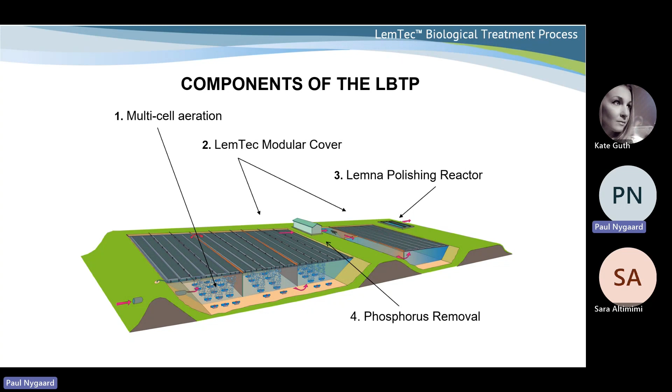So if the influent is coming in at say 10 degrees Celsius in the wintertime, and we have a detention time in the lagoon of 20 days, and the lagoon's in Green Bay, Wisconsin, we can look at historical temperature performance. We can size the insulation value of the cover so we have a known effluent coming out of the plant. That's critical from a design perspective, because now we can design at a much higher wastewater temperature. Instead of 1 degree Celsius, we can design at 7, 8, 9 degrees Celsius.

A typical covered lagoon like this will see a temperature loss in the worst time of the year, in January, of about 1.5 to 2 degrees. So it conserves nearly all the temperature that's coming into the basin. If it's coming in at 10 degrees, it's going out at 8 degrees Celsius. So that's the temperature we have to work with.

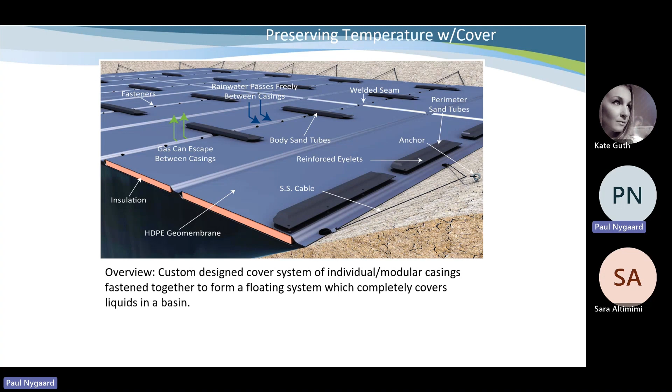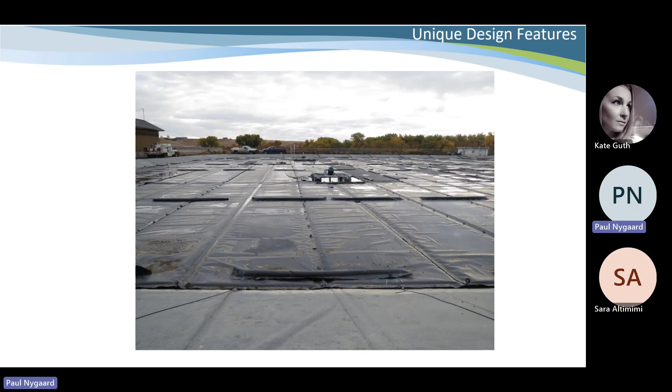Some photographs here that'll show a few more details. A couple of the main key components to point out here, you'll notice the cover panel that's immediately to the right of that mixer is a little different color. That's what we call our walkway panel. So that's a 4-inch panel. It's made from a textured HDPE. It's a little thicker panel. It just makes it nicer for walking out on the cover.

You'll notice the aeration lateral is sitting in the cover seam right to the right there, which is right here. So one of the nice features of this is our diffusers are suspended off the lagoon bottom about half a foot, and there's an access panel located here. So there's 4 diffusers on this aeration lateral. So if you wanted to service that diffuser, change out diffuser membranes, the operator can walk on the cover, flip that hatch open, retrieve the diffuser, slide out new membranes, put the diffuser back down. So it makes getting at equipment a little easier than either a floor mounted system or a system that has a floating lateral and hanging diffusers, where you'd have to be out on a boat.

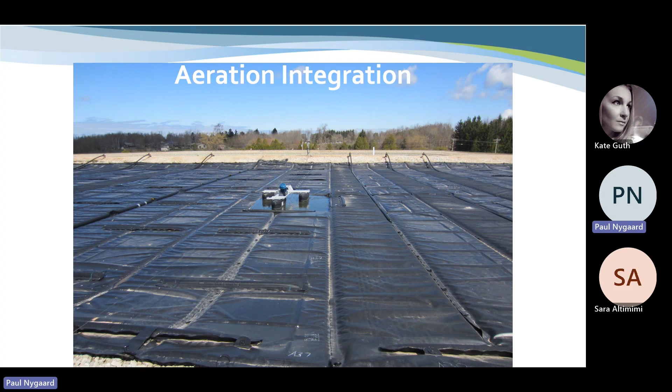So operationally, it's got a little bit of an advantage from that perspective. So this is an application with riprap on it. It just shows you a little more close up of how the cover integrates with the aeration laterals and so forth coming up from the shore.

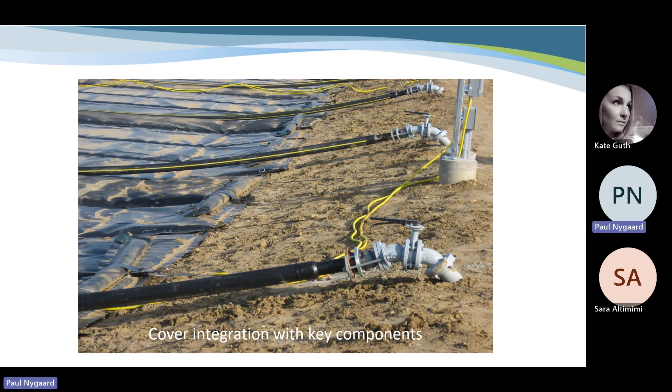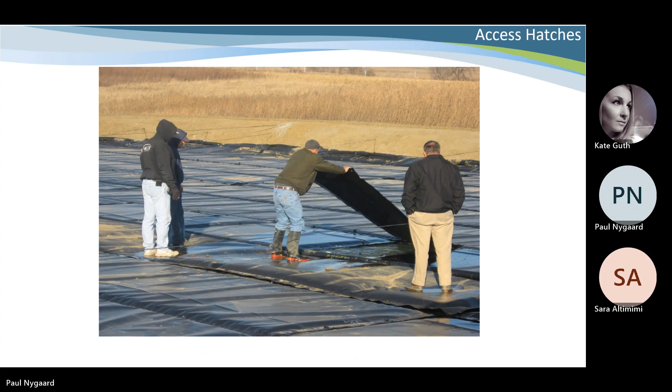Some guys out on the cover looking at a diffuser, getting ready to pull up a diffuser. That's what that looks like.

So this is the polishing reactor. This is a little older view of it, but the photo on the left there is a reactor in operation. So that tank is 10 foot of water depth, and the media shown on the right is what's in that basin. So that media is our lower density media. We have 3 or 4 different densities of media depending on the application. That configuration is a 6 foot by 8 foot deep bed in a 10 foot reactor tank.

And then you'll see each one of those aeration feeder lines feeds a row of coarse bubble diffusers that are sitting underneath each cube. Those are modular in nature, those cubes can be pulled out of the tank, reinstalled. Although we don't see a lot of, really any maintenance to the process from that perspective. Some of the benefits of having this fixed film approach is minimal sloughing of that media. We don't have to mix it. We're only aerating the media, so we have quite a bit less energy, all things considered, in comparison to, say, a moving bed reactor and so forth.

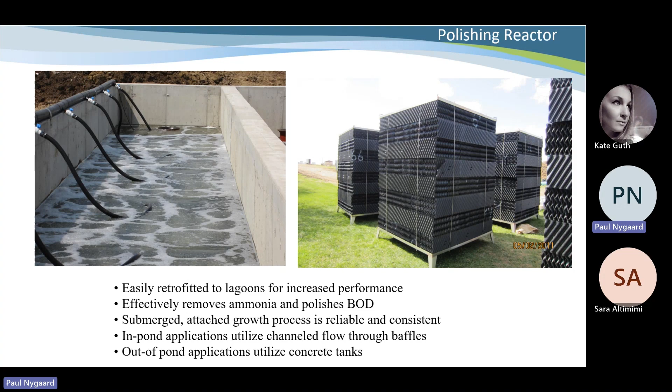It's a one pass-through flow, so we're not recirculating anything here. Flow comes in one end of the basin and out the other end. There's a smaller reactor, probably a 100,000 gallon a day or so polishing reactor there. Flow comes in the close end there, and then we have a pre-aeration diffuser for mixing in that application, and then flows through four reactor cubes before discharge.

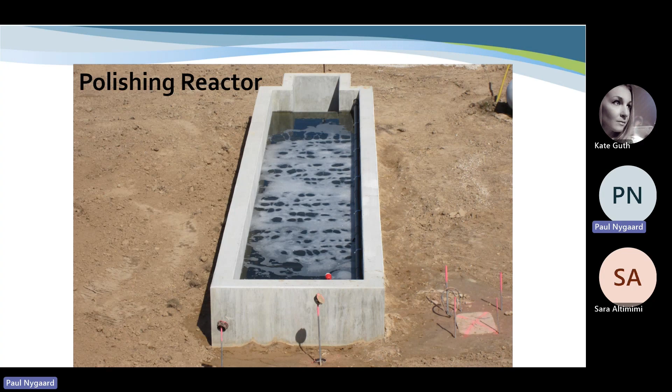It's normally covered. So this was taken before it was covered. And most of the reason we cover them is really more for algae growth than anything. By that point in time, the water's so clear you can kind of see right through it. That sunlight, you just get algae growing in there, weeds and stuff, so we tend to cover them. Do you use the same type of cover? Yeah, we use our same cover panels on it.

So let's go through a couple different case studies here just to give you a flavor for what this is about. This is a map I put together to show some comparative plants of interest. We took a climate map that was already developed for climate zones for some application and put it in colors. The green, purple, and blue shaded areas represent temperatures that are relatively similar across the country.

For instance, if you looked at a facility in Wisconsin that was in blue, and compared it to a plant in Montana or wherever, those would basically represent a very similar winter climate, within 10 degrees or so. So this allows us to do a comparison. If you're wondering where we have a facility in a certain kind of climate, you can look at this map and get a flavor for it. That's why I put it together.

Some of the facilities - you can see quite a few reference facilities that we have here in the state and so forth. Again, this is just focused on the cold, so I didn't show any plants in the southern half of the country that we have in operation.

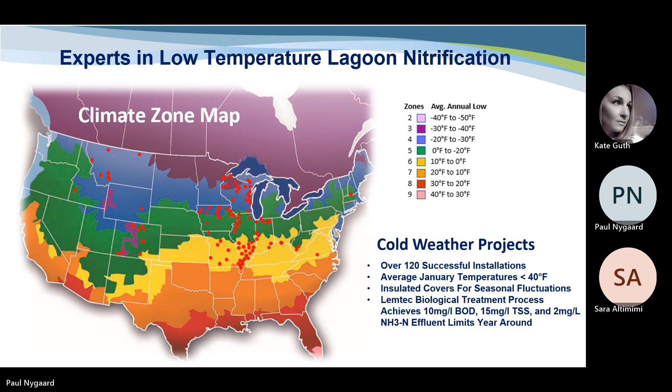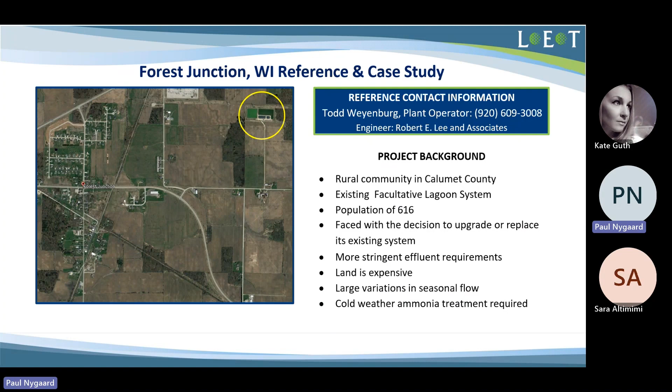So this is the first case study I'll start with - Forest Junction, Wisconsin. This was an upgrade of a seasonal discharge lagoon, with both ammonia limits and phosphorus limits. I think this probably started up in 2014, 2015 or so. Pretty small flow, only 600 people.

Here's a closer up Google Earth image I took. You can sort of see the outline or layout of the old seasonal discharge - they had that large square lagoon on the left, and the right-hand lagoon was a large rectangle. Obviously with seasonal discharge versus continuous discharge, we need a lot less volume.

So they built out the two process lagoons in the corner of that second facultative seasonal discharge lagoon. Now we have two primary treatment lagoons. The first cell operates as a 3-cell aerated lagoon - cell 1 is a complete mix cell with a baffle curtain, and cells 2 and 3 are partial mix lagoons with a baffle wall in between.

You'll notice the blower building south of the first lagoon also has their chemical storage tank for phosphorus removal there. We had phosphorus added in a manhole, and there's a flash mixer basically where you can't see - you can see that little dot right in the middle, between the two lagoons. So we've got chemical addition there.

And then we have a baffle curtain installed in this settling pond and a floating mixer - we call this our flocculation zone, so we get better mixing of the chemical. We use the remainder of this pond for precipitation of our phosphorus chemical. What comes out of there goes through the polishing reactor discharge and then out.

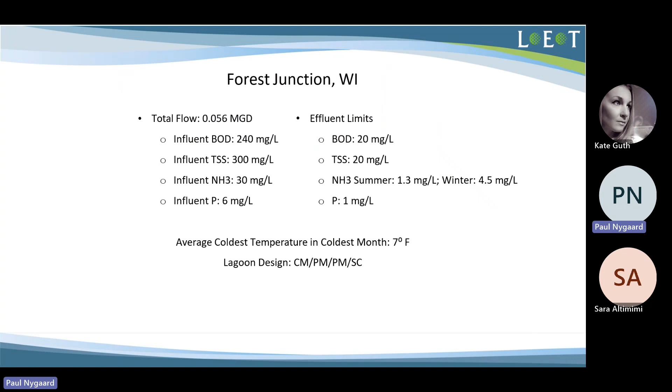They tend to adjust their alum - I think they're using PAC now. They tend to adjust their PAC upwards until they're right around that 1 milligram per liter, get a little high, and stay right at that number. If they wanted to, they could probably meet something quite significantly less, but their numbers kind of just hover along 1 as they conserve their chemical consumption.

Some photographs during and after installation.

That first photo on the left was during the install, so we hadn't installed the aeration laterals yet. Normally the cover gets installed first and then all the aeration and baffles get installed from the surface of the cover. They assemble the diffusers and drop them down through the hatches of the cover, then close the cover back up. That's where that first photo was taken.

That's looking back from the effluent of the aeration pond towards the influent, with the guys out on the cover installing the first baffle. The second photo is after the aeration laterals were installed and all the piping's in place. You can see the blower building and the chemical storage tank there.

And then the third photo is of the settling pond. You can see the polishing reactor there in the background.

Can the covers take like a big 24-inch heavy wet snow? It's just a matter of displacement and how much buoyancy or what thickness of cover we have. If you have enough snow, you'll get push down on the cover and then the snow will melt.

There's enough heat loss through the cover that over a few weeks, if you have a snowfall, after a couple of weeks that snow will slowly melt off and drain through there. In the worst part of winter, that snow will stick around a little longer. If it's a spring or fall snow, then it melts faster.

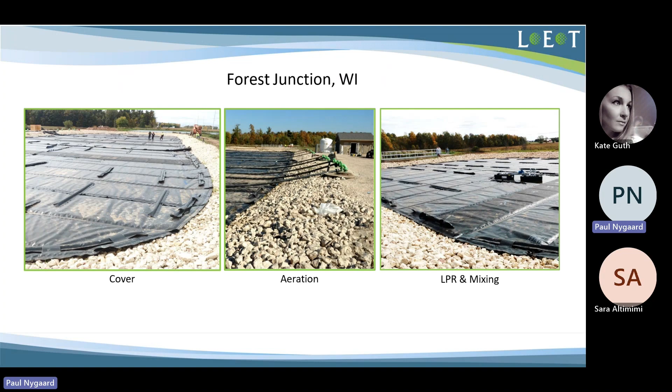Just some data. It's hard to look at these graphs, but I could shoot you all sorts of data from these plants if you want to take a look at it.

The typical trend you'll see in most of these plants from a standpoint of BOD removal is there isn't a seasonality to it. Most lagoons have great BOD removal in summer, with numbers creeping up in winter and dropping back down in summer. If there's a turnover of the lagoon, it usually has an effect. With the cover on the system, we don't have a turnover on the lagoon, and you don't have the temperature variability from a standpoint of BOD removal, so the BODs pretty much stay really consistent.

For instance, in Illinois, most of our facilities have to meet a 10 CBOD limit, and you can meet that limit without issue with this technology on a continuous basis.

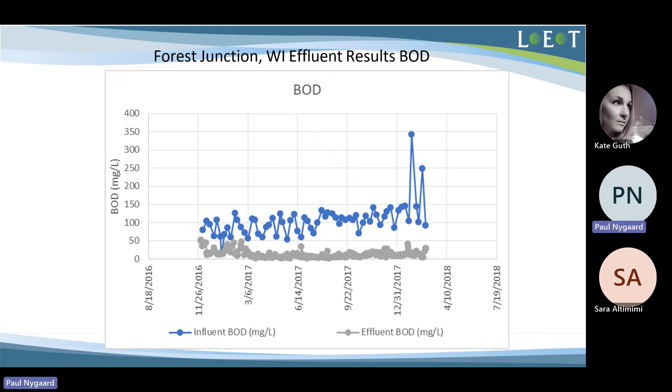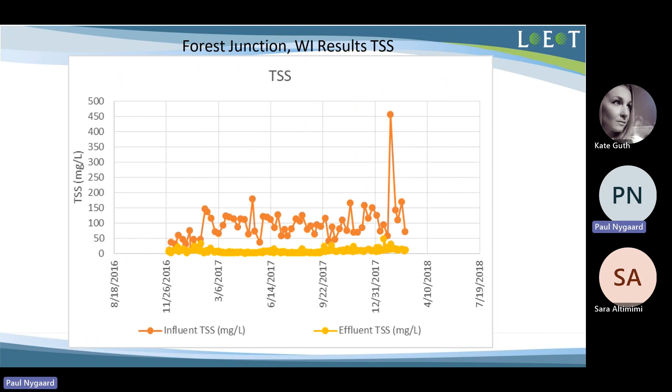Same thing goes for solids removal, since we're not growing algae in this process and everything's covered. Any TSS excursions really isn't an issue. Lagoons aren't turning over, so you don't have a TSS rebound from a standpoint of generating solids. So TSS performance tends to be extremely good in these plants, and this is early on in startup.

Once these facilities get acclimated from a nitrification standpoint, there tends to be very little variability as far as ammonia removal. There's either a disruption in performance, or it's either nitrifying or it isn't, and that's what we tend to see at most of these plants.

Next plant here, similar name, similar location. This is in Forestville, up in the Door County area. It's probably about the same size, a few less people, but I think the flow is pretty darn close.

This application, the last one, was basically brand new construction - even though they built it within the confines of that lagoon, it's representative of a clean sheet of paper, building a new plant. This one is more representative of a plant that used the existing volume the plant had and was able to get by with very little civil work or dirt moving at that plant.

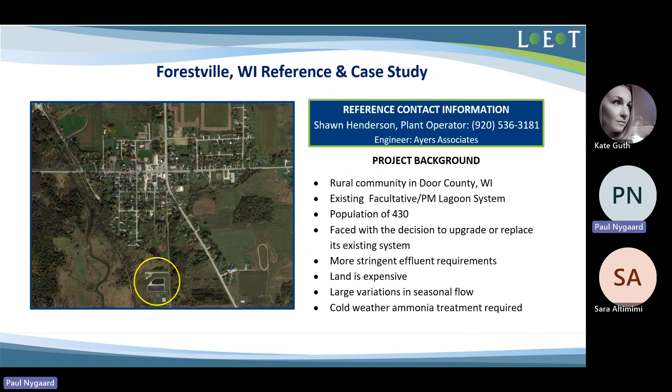This facility had two lagoons, a smaller rectangle with the corner cut off, and then a large rectangle at the bottom. One of the primary benefits of this technology is because we're treating BOD at a higher kinetic rate from a temperature perspective, and many of our facilities incorporate complete mixed reaction kinetics in the front of the plant. The volume requirement of this technology is much less than an open air partial mixed lagoon, which tends to mean we need much less volume from a standpoint of aeration detention time.

So this is a pretty typical application where they had two lagoons. We really only need that primary lagoon for treatment, so they kept the other basin to use for high flow events and emergencies. But primarily all the influent comes through the covered 3-cell aerated lagoon before going through the polishing reactor.

So that covered lagoon is a complete mix, partial mix, settling pond before flowing into the polishing reactor that you can see there, just north of the lagoon and south of the building, then chlorine disinfection and discharge. This plant does not have a phosphorus limit.

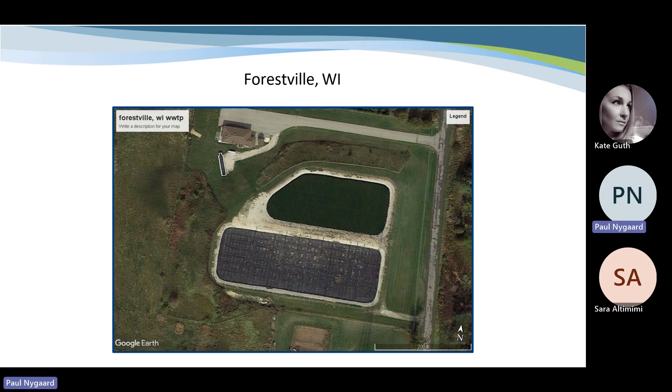Their ammonia limits were basically the same as Forest Junction. Flow is 57,000 gallons, so it wasn't much smaller.

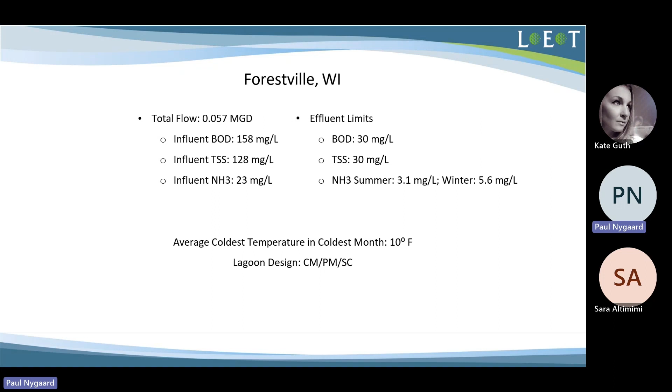This shows the layout of the aeration: a 2-cell aeration, aerated settling pond. Most of our facilities have aerated settling ponds nowadays. We've learned a lot about solids digestion in these processes, and we get much better solids digestion and storage capacity in the settling ponds by aerating them. You'll see a couple of diffusers in that application.

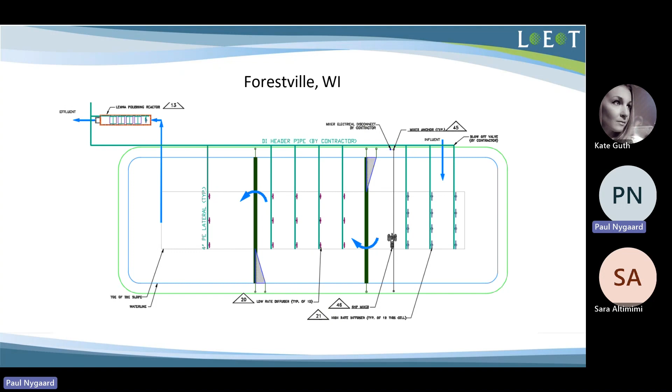The polishing reactor is a pre-aeration diffuser, and then a 4-cube reactor before going out to the effluent.

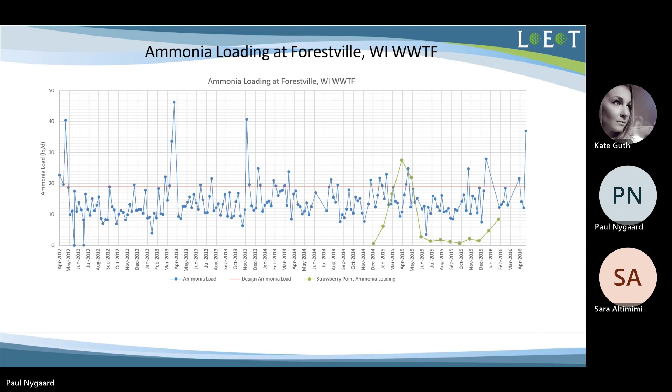This is just the ammonia load coming into the plant, the ammonia load prior to the reactor, and the effluent. This was during the first 4 years of the plant starting up.

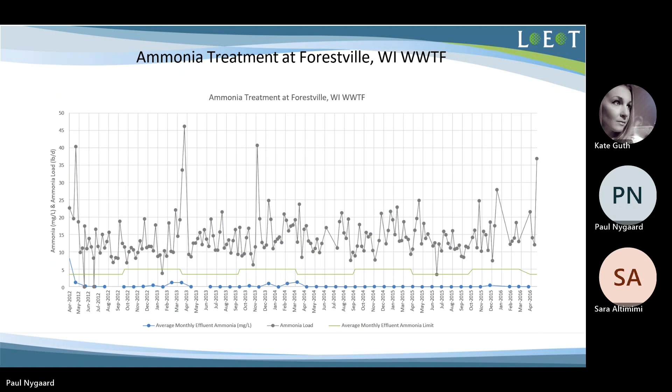This next one is a bigger facility. I'd put this in the category of a retrofit, but by the time they were done with the plant, it might as well have been new construction from the ground up. A much larger facility, serving a population of almost 4,000.

This is more of a traditional partial mix kinetic design here from a lagoon perspective. That was primarily an energy decision - they were trying to get by with as little horsepower as they could, so that gave us the best scenario for that.

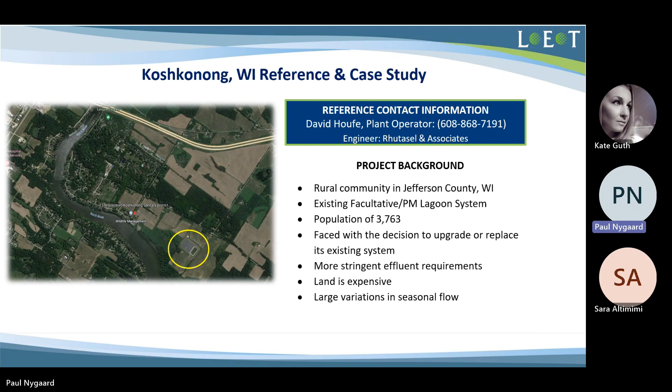The primary driver here, again, was similar to the others: ammonia limits, as well as a phosphorus limit. As we go up in our design flows, we tend to design in more operational flexibility to the processes. On smaller flows you can get by with a single lagoon or maybe two, but as flows increase we tend to add operational flexibility to the configuration of these plants. Here are the design conditions.

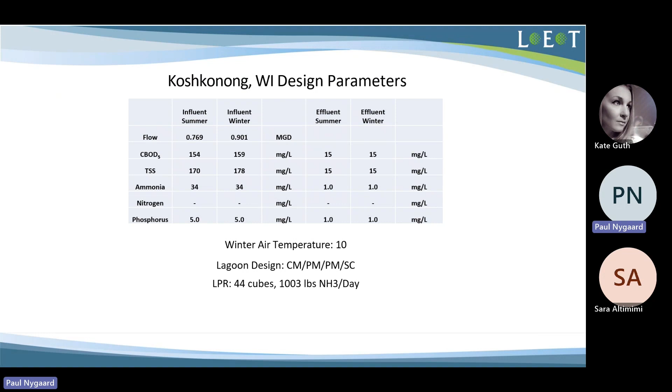Our targets were 15 BOD and solids, 1 milligram per liter of ammonia, and 1 for phosphorus.

This is a 3-lagoon facility. Each of the first 2 lagoons is basically a 2-cell partial mix lagoon. So pond 1, to the north, is a 2-cell partial mix, and the second pond is also a 2-cell partial mix. We have chemical addition between the second and third cell, and an L-shaped baffle in the third pond where we do flocculation mixing, with the remainder of that pond used for solids storage and settling prior to the polishing reactor and discharge.

So again, very similar to the other facilities, just on a larger scale based on the flow.

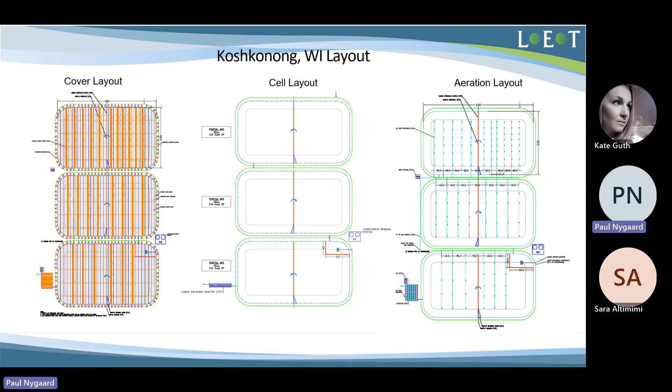They had all sorts of liner failures with the settling pond, so this plant was started up and shut down numerous times through construction. It was kind of a nightmare, but it finally became fully serviceable about a year ago, so it's a pretty new plant.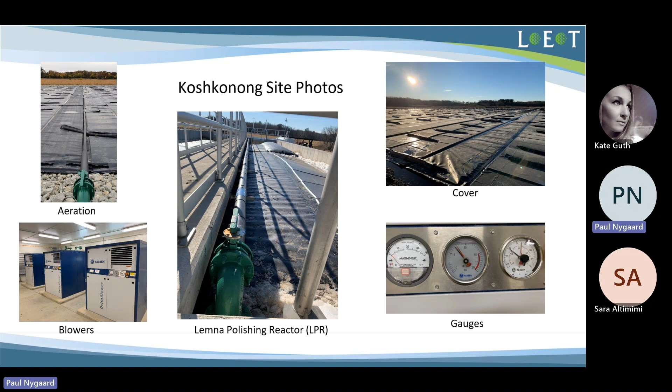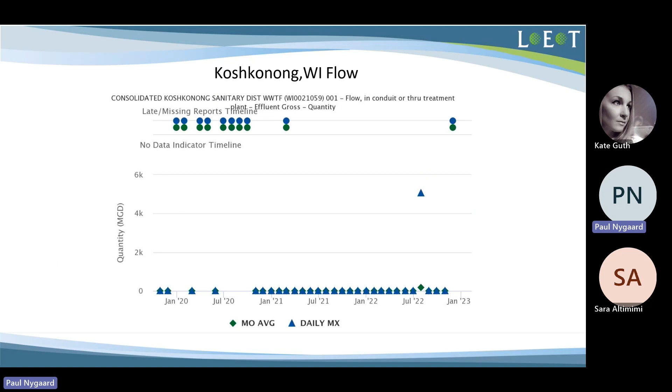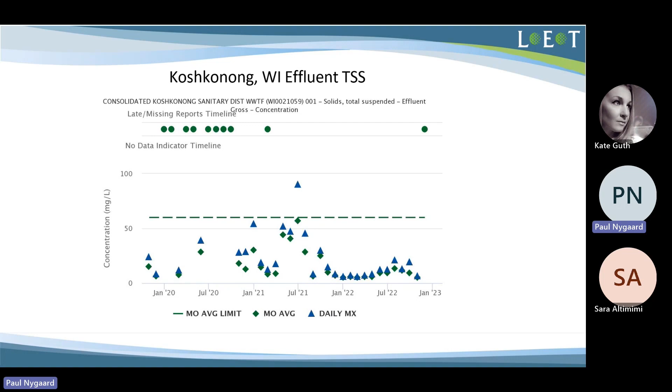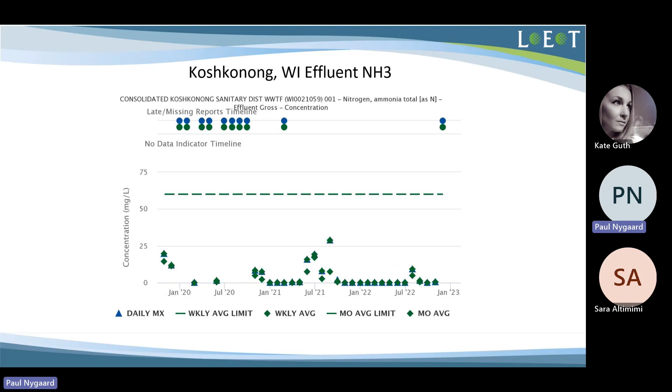That's the most recent installation that we have up and running, and we have a plant in Thorp that's in construction this summer. That'll be the next plant going in the ground.

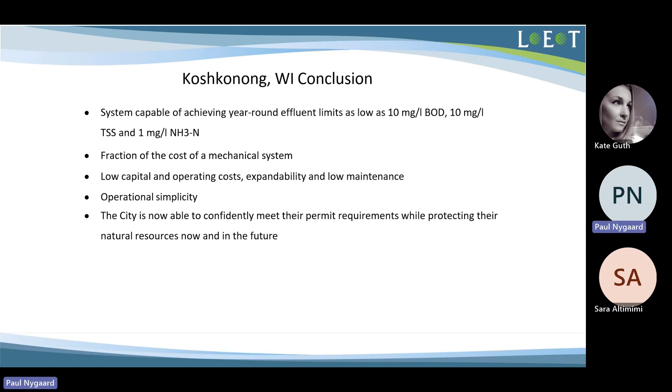Yeah, that's a big flow there, right? Yeah, it's big, a little bigger than Koshkonong, just under 1 million gallons. Largest facility we've done to date. We did a plant in Poplar Bluff, Missouri, probably 5-6 years ago or so now. That was a 10 MGD plant.

So the smallest we've done to date is probably 10,000 gallons a day, and that's the biggest plant we've done here domestically. Is that the design flow of 10 and a peak flow of 17?

But they had an existing lagoon plant. They were used to paying the electricity bill for 5, 200-horsepower blowers, and when you look at the cost, they upgraded that 10 MGD plant for about $15 million. So think about what a mechanical plant would have cost — we couldn't touch it. You could write a lot of electricity bills for a long time with the savings from this plant.

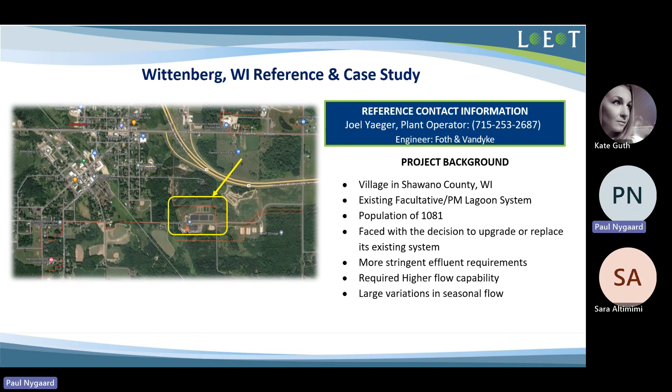This last one here is the Village of Wittenberg. I'm sure you guys know what Wittenberg is, off of 29 there. This upgrade was really twofold. One was the increased industrial load with the meat packer, the casino, and so forth, and they had an ammonia limit as well as a phosphorus limit here. But the primary driver really was trying to get extra capacity out of this lagoon plant.

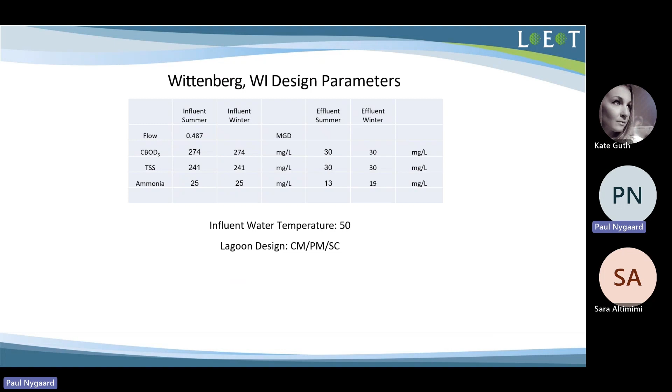So this facility has an extremely small footprint as it relates to hydraulic retention time through the lagoon system itself. Pond one has a total HRT at design flow of less than 5 days, same with the second cell. So it's a very high rate, highly aerated and mixed lagoon process here.

That first cell operates as a complete mix. The second cell can operate in complete mix conditions or partial mix, and then we have this really small detention time settling pond — it only has 2 days of detention time.

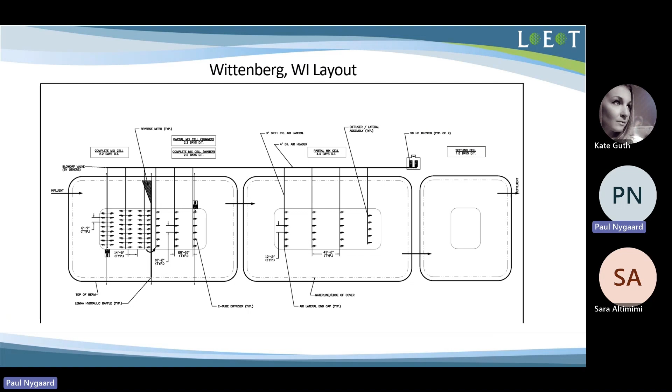So when they constructed this lagoon, knowing that solids — like in any process, there's really two questions: do you want to leave the solids and forget it, or handle them every day? Those are really your two choices. The approach here was, we don't have enough volume to treat it every day, so what else can we do? So this lagoon's settling pond basically tapers down to a cone.

They created a homemade kind of stilling well in the bottom of this lagoon, with the influent pipe coming right to the bottom center of the lagoon, and they draw off the top. So all the solids get collected in this little square in the bottom of the lagoon, and they ran pipe down the side slope of that. Then, usually once a year, they'll pump the solids into those reed beds north of the plant, and that's where their solids have gone for the last 15-plus years or so.

Their ammonia limits here are high enough that we can get the nitrification we need in the lagoons without a reactor, so this plant doesn't have a reactor. Their phosphorus limit was added sort of after the plant was upgraded, and I don't really have a good handle on what that looks like right now, but they're down on that road.

So this is a different application where they have a little higher ammonia limit that we can meet in a complete mix scenario with a cover, without a polishing reactor, and they tend to do pretty good here. This plant's been in the ground — I'd say 2006 or '07, if I had to guess. I don't remember exactly, but it's been around a long time.

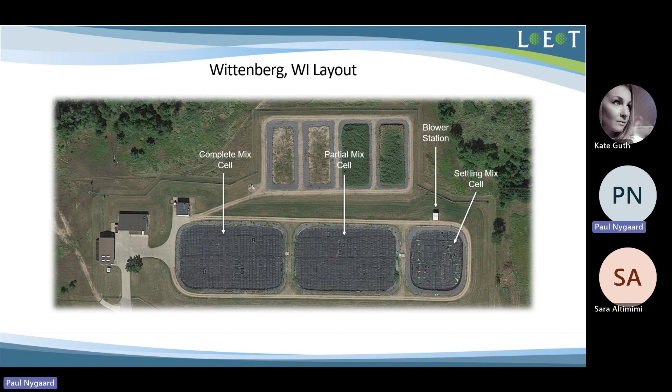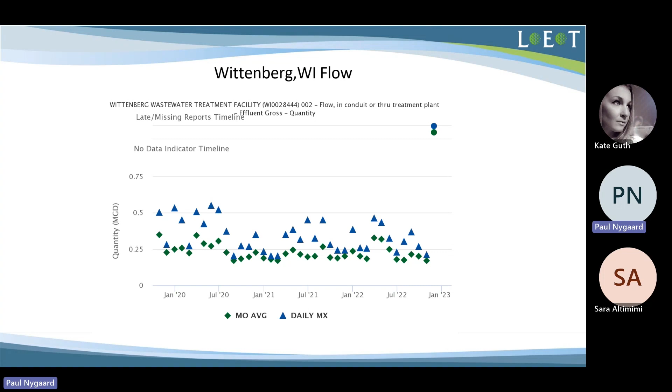So yeah, their flows are creeping up to their design condition here. They see a lot of daily max flows at their design condition. This is an extremely aggressive hydraulic retention time lagoon, and they put out a pretty decent effluent given the challenge they have from a detention standpoint.

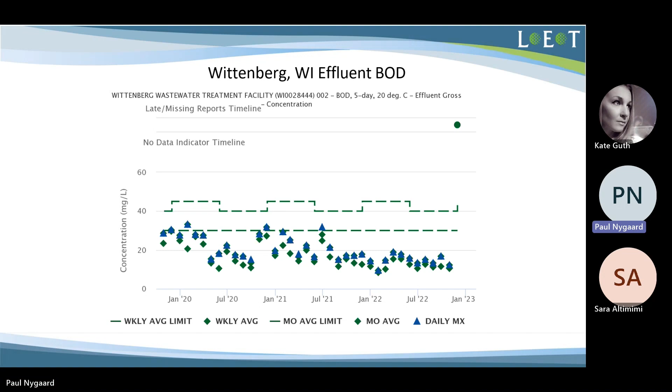When the floating cover technology was first developed, there really wasn't a market for it at the time. There weren't a lot of states that were heavily into ammonia limits, especially in the northern climates. One of the primary applications we had for that technology was really where we were out of hydraulic capacity, where we could use the cover to augment temperature and make modifications to the aeration system to get a lot more throughput of treatment out of our very small footprint. With that, I'll open it up to questions you guys have.

You'd mentioned, on the polishing reactor side of things, that there was an option to do denitrification. How does that work? So primarily we'll do that with a carbon addition on a second stage after the nitrification step.

So it's non-recirculation. That configuration is great for smaller flows. It's something you probably don't want to tackle if it's a 1 MGD plant, but that's the configuration. Downstream of that will depend on what we're trying to meet from a total nitrogen standpoint and what else we have to meet from a BOD level standpoint.

We'll maybe use another lagoon to just partially aerate for settling and clean up any BOD or too much carbon addition. Most of the ones we do with carbon addition, we may pace off a flow, but we're not putting a bunch of controls in the system. It's kind of put carbon to it and step away from it, because these lagoon operators don't know how to operate it, so you need to have some way to buffer that issue at the end.

So usually what we'll do is an aerated lagoon, nitrification, denitrification, and then if they've got another lagoon, we use that as kind of an aerated settling lagoon to clean up the BOD and get rid of any additional carbon at the end of that. So it's okay.

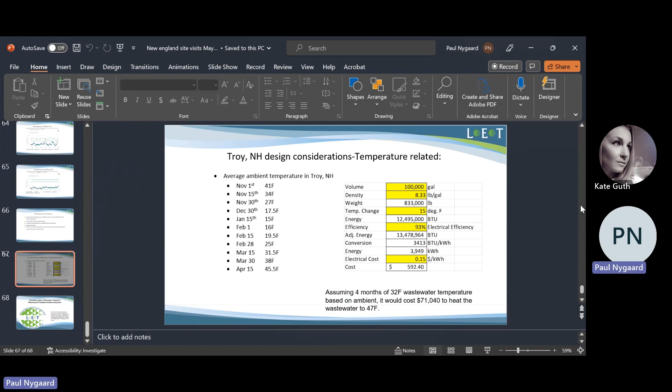You show phosphorus removal in the very first slide. Is that an add-on filter, what you do there? Sorry, I didn't explain that very well. That's, if it's like an add-on process. So when we talk about what we do for phosphorus removal, let's see if I can find it.

So our sum total of equipment for phosphorus removal is basically a chemical feed skid or something, a pump, a tank, mixer, a diffuser, a manhole, and then a settling zone. With that equipment, we can get you to a point of 0.5 milligrams per liter. If we have to meet lower than that, obviously filtration after the polishing reactor would be the next step.

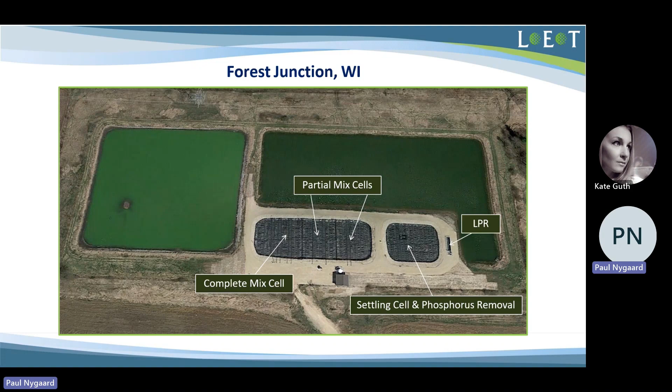But we can handle all the binding up of the phosphorus from a chemical injection standpoint within the lagoon itself. Then it's just a matter of separation after that.